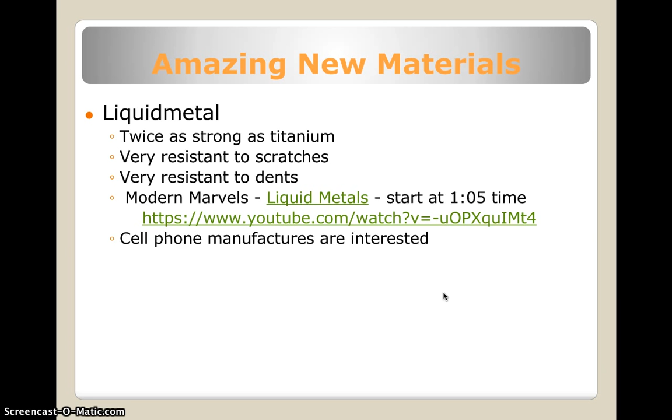Thank you. All right, the next new material that's just amazing is graphene. Graphene is the strongest material ever measured, 100 times stronger than steel, stiffest, thinnest than we can even imagine. It almost seems like something out of a comic book.

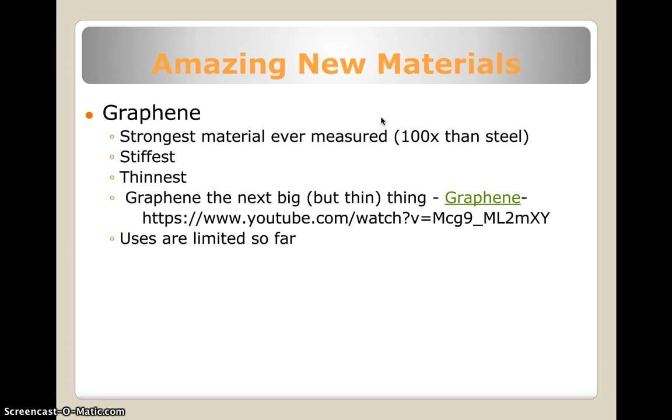Thank you. The thing is, with graphene, the uses are limited so far. We haven't got to the stage where manufacturing, being able to use it on a large scale, has put the research or time into dropping the cost.

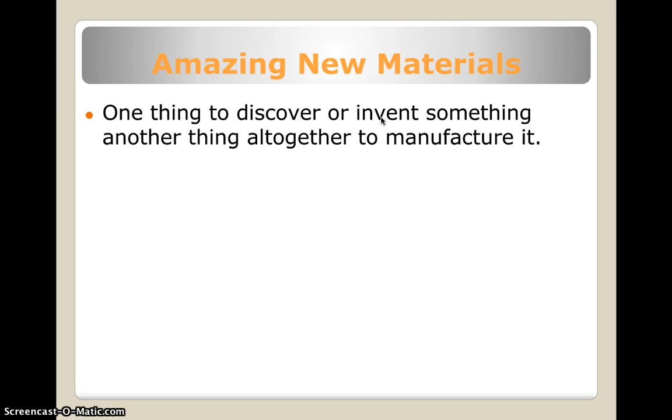One thing is to discover something. The other point of this is to altogether manufacture it. You can discover and invent, but if you cannot manufacture on a large scale to get the cost down, it can't reach the masses. A great quote to identify this is: the more innovative, the more breaking the mold the innovation is, the less likely we are to figure out what it is really going to be used for.

There's a large quantity of technologies and discoveries, etc., that have basically sat on the shelf until the research and development and cost-cutting procedures put into manufacturing have made it accessible to everyone and useful.

All right, restricting adaptations in the marketplace, or why don't I see this wonderful stuff in stores? You have to be able to make it, and not just make it one by hand. It has to be better or cheaper than existing products.

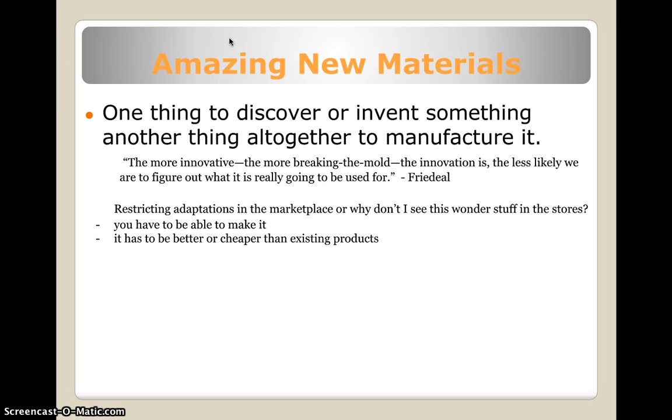And we can look at this, for example, silicon. 100 years between the discovery and then the use of silicon chips. Silicon chips are used in everything. It's a great conductor and regulator of heat within electronics. But it took a lot of time and research and development money to get it to the point where it could be mass produced through manufacturing.

Aluminum is another great example. 1850 discovery - it was extremely expensive. It was pretty much used as jewelry. Think about aluminum being used in jewelry - we don't even think of anything like that now. In the 1880s, it started being mass produced. That took 30 years. Think about that. And then it was almost another 40 years until it started being massively used in airplane bodies.

And then now think about it - we can't go our day-to-day without seeing a piece of aluminum. It's everywhere. It's really dropped the cost.

Another example of this is with gasoline. Gasoline was used after the discovery of oil through Drake's Well. We're talking around the 1850s, Pennsylvania. In the process, the primary thing people were using crude oil for was to get to kerosene. Kerosene was very stable, it burned at an equal level that you could contain. It was used for light.

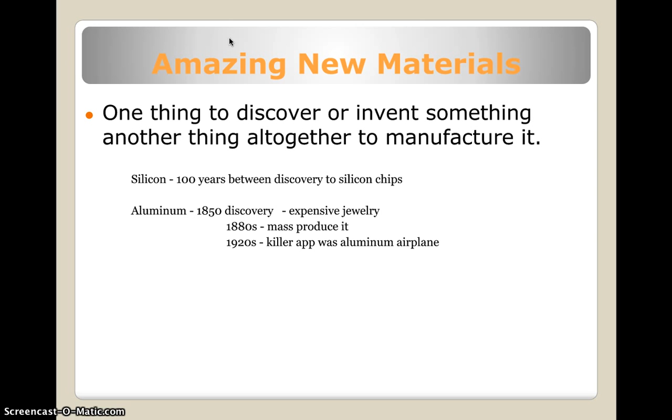So there's a lot of things that are discovered and created and used, but not until it's able to be mass produced or manufactured or have a place for it.

So what is material science? Material science is the study of solid matter. It investigates the relationship between the atomic or molecular structure of material and its micro and macroscopic properties. Micro meaning cannot be seen with the naked eye, it's too small. Macroscopic is small, but it can still be seen with the naked eye.

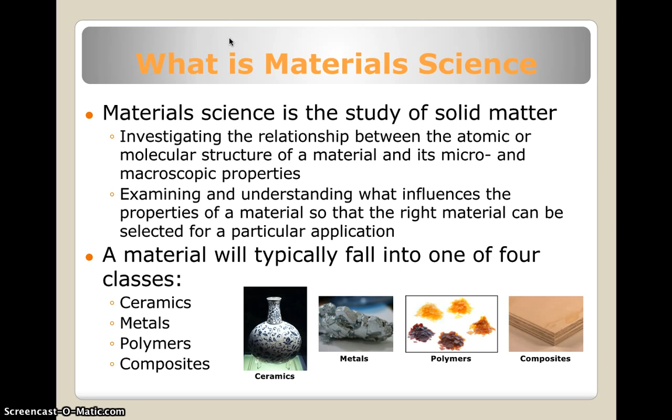Examining and understanding what influences the properties of materials so the right material can be selected for a particular application. Everything we use and come in contact with today has gone through some type of process like this, examining and trying to see what materials can be used for and the best use of them. Material typically falls into one of four classes: ceramics, metals, polymers, and composites. We're going to look at all four of these.

What is a ceramic? It's an inorganic, non-metallic solid created through heating and then cooling. What are some unique properties of ceramics? Ceramics are generally brittle, hard and strong in compression, but not other types of loads. Does well with compression, which is a pushing force, but doesn't do well with tension, which is a pulling force. They're generally better at withstanding corrosive environments and high temperatures. This is why we use these items with cooking and baking. You can put them in an oven, and they can handle heat very well.

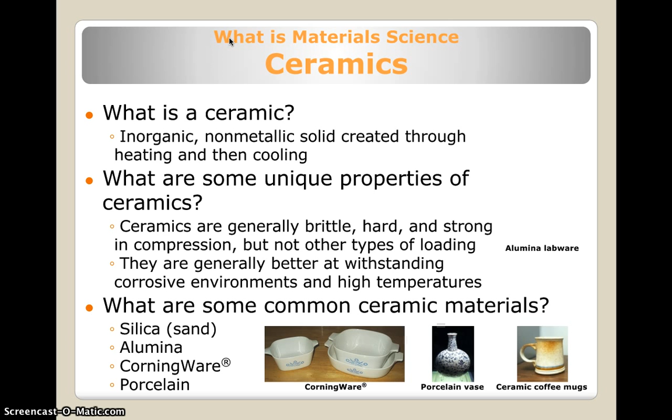The common ceramic materials are silica, sand, alumina, CorningWare, and porcelain. Here's some examples in the images. You probably have those in your kitchen.

What is metal? Elements or compounds that have good electrical and thermal conductivity. What are some unique properties of metals? Metals are metallically bonded, and therefore their outer electrons can easily be removed. They're generally malleable and ductile. Malleable means to be shaped. Ductile means to be turned into wire, and they have higher densities than non-metals.

What are some common metal materials? Elements: iron, copper, gold, silver, and tin. Some alloys are steel and nitinol. The thing that's wonderful about metals is that they're used in our electronics, housing and construction, roads, wiring. They're everywhere because of these properties. They're an amazing resource that we have.

Polymers are chemical compounds with a structure of many repeating subunits, often called monomers. What are some unique properties? They tend to form glasses and semi-crystalline structures rather than crystalline structures. Polymers are strong, flexible, non-reactive, and moldable.

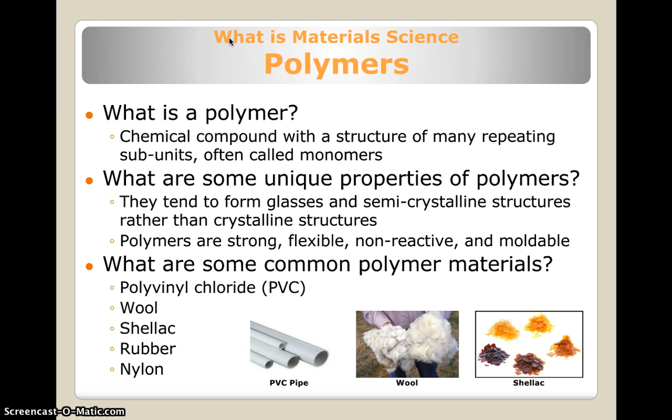Here are some common ones: polyvinyl chloride, PVC pipe, probably have this in your house, in your plumbing. Wool, shellac, rubber, and nylon. Nylon and wool are used in clothing.

Now, what is a composite? A material created from a combination of two or more different materials. For example, Portland cement plus water plus fine aggregate sand plus coarse aggregate gravel equals concrete.

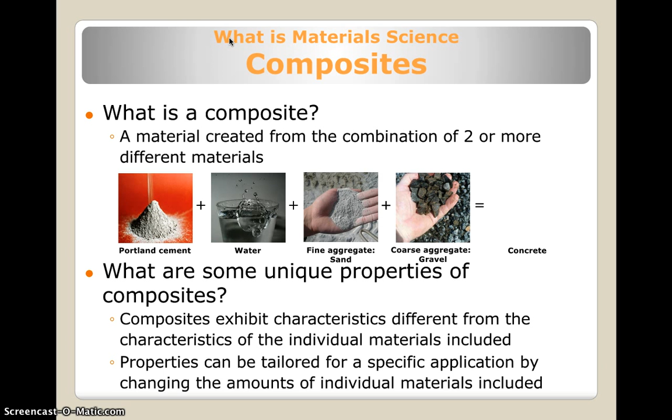What are some unique properties of these composites? Composites exhibit characteristics different from the individual materials, meaning all four above materials have different qualities and characteristics, but when they are combined, they make something different. Properties can be tailored for a specific application by changing the amount of individual materials included. For example, if I add more water or more sand or more gravel or more Portland cement, it will change what my concrete's going to be like. I can make it softer, I can make it harder, I can change the process of it and its characteristics.

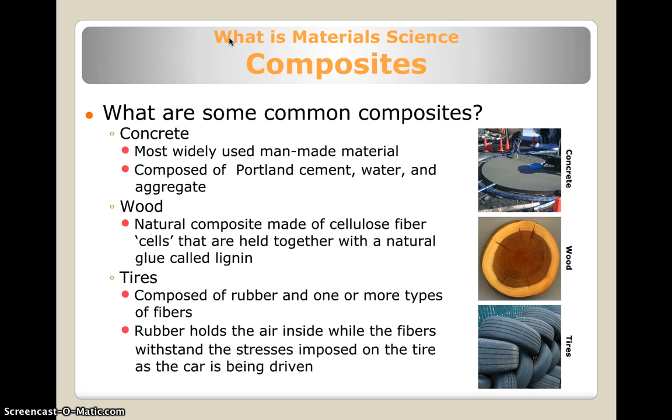Now, what are some common composites? Concrete, obviously, we just talked about that. A natural one is wood. It's made of cellulose fiber cells held together with a natural glue called lignin. Tires are composed of rubber and one or more types of fibers. Rubber holds the air in while the fibers withstand the stress imposed on the tire as the car is being driven. If you've ever been on a tire swing or seen an old tire, you know exactly what I'm talking about.